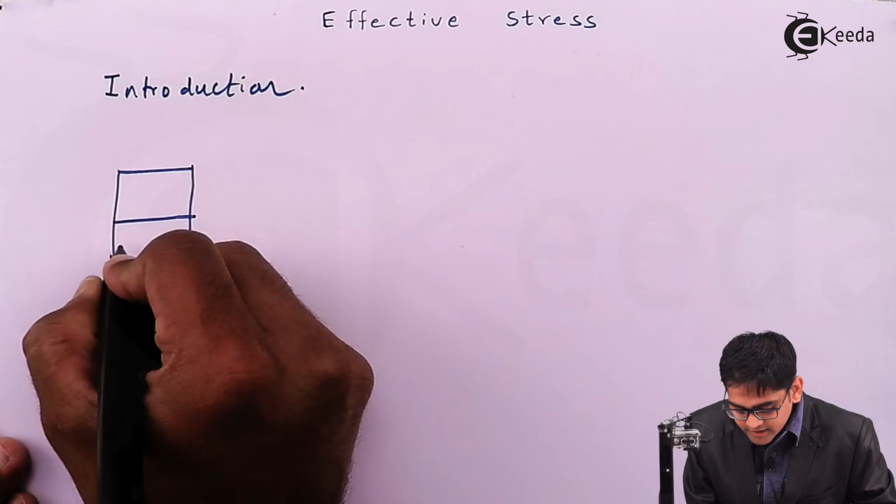So let me start with the introduction first. As you're aware, soil is a multi-phase system. Multi-phase system means it consists of solids, it consists of water, and it consists of a gaseous phase, which is air. So that's what we have seen in the three-phase relationship.

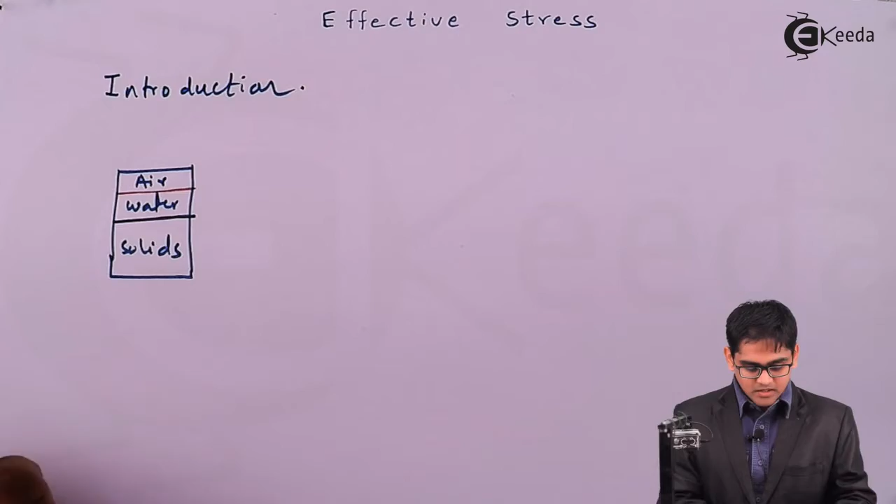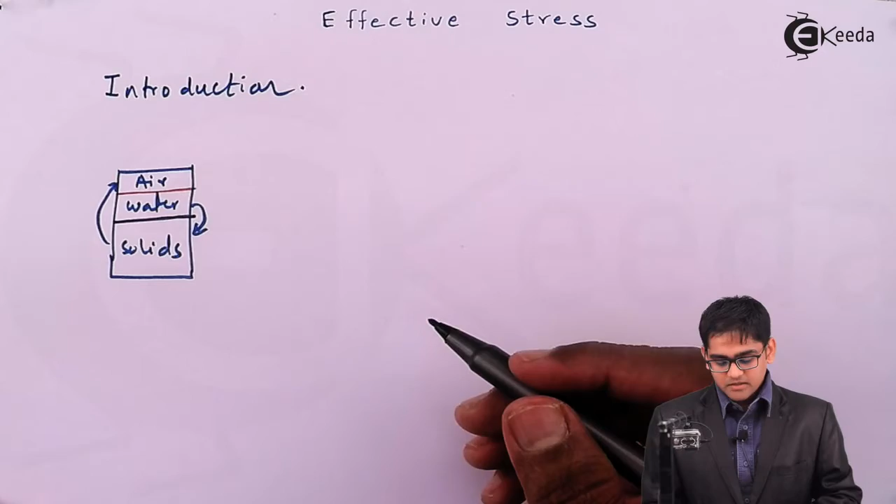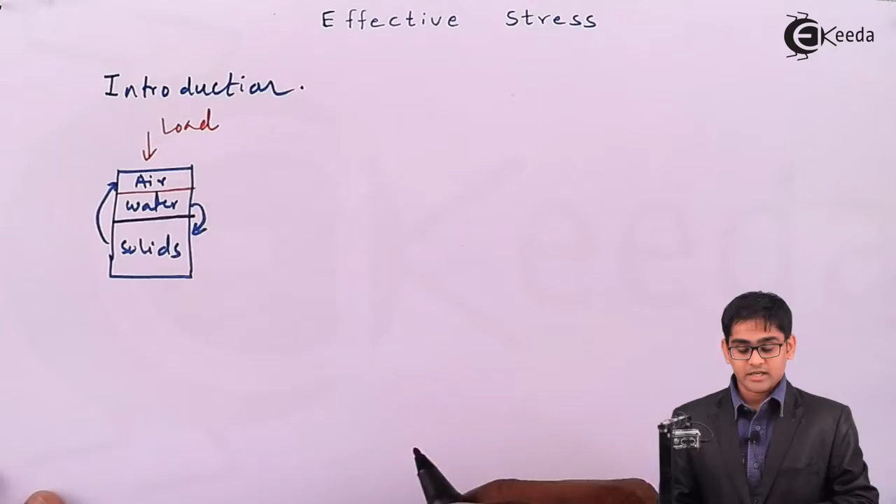Remember, since it's a multi-phase system, you have a kind of interaction of this water along with the solid, and also the interaction of the solids with the air. All these kinds of interaction play an important role once you apply a load onto the soil. So this kind of interaction, and how the soil will behave under the action of the load, is truly determined by these interactions. As you're aware, if you take a very fine grained soil, suppose if I take a clay,

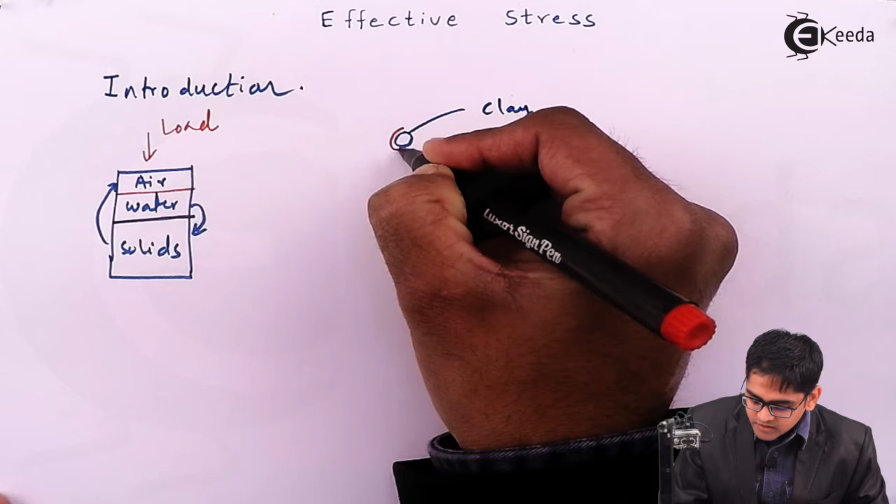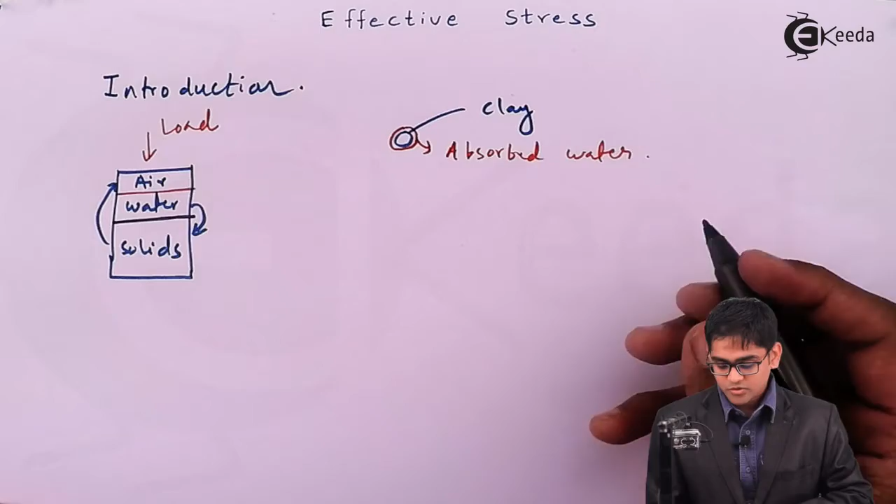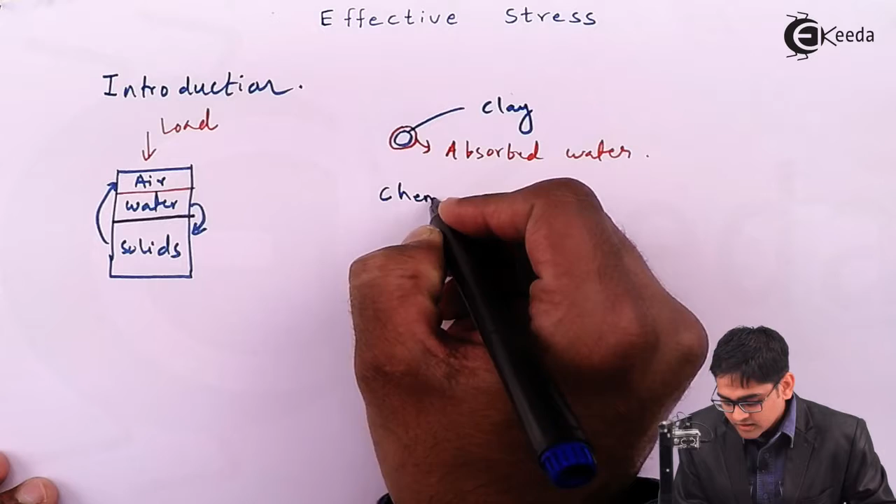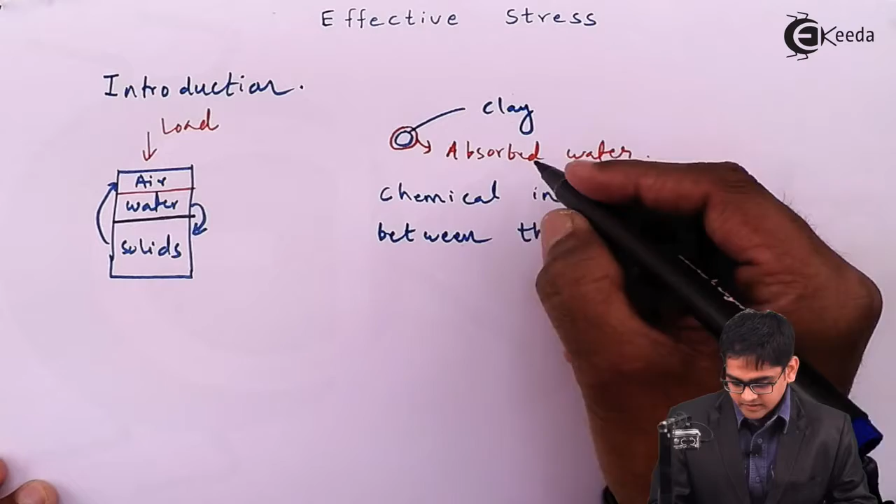the clay has got a layer of water surrounding it. We call it absorbed water. This absorbed water plays a very important role, because clay, as you're aware, is formed by chemical weathering, so therefore there is a kind of chemical interaction between the water and the soil solid. There is a chemical interaction between the water, which is nothing but the absorbed water, and the minerals - the major mineral present in the soil is montmorillonite.

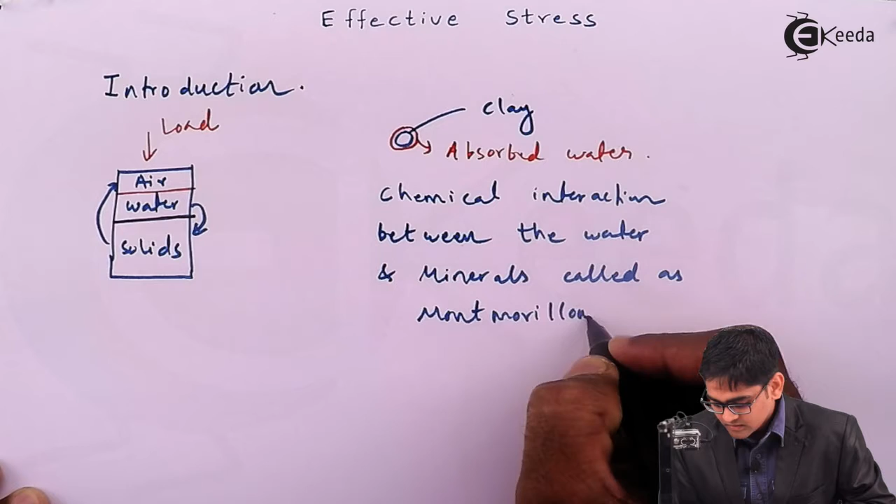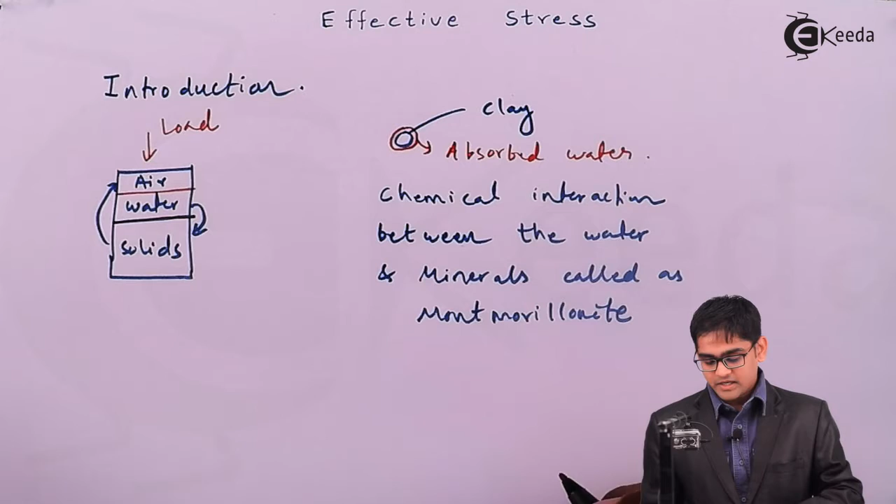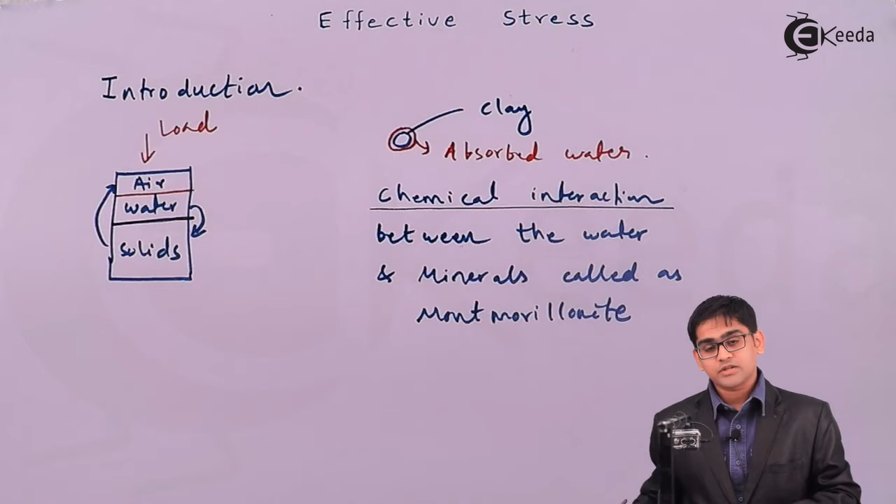Absolutely, we have three different minerals in the clay. We'll talk about it in the later course of time. We have montmorillonite, we have illite, and we have kaolinite. It is specifically discussed in the clay mineralogy chapter. So this kind of interaction, which is specifically a chemical interaction, is very important, which governs the behavior of a soil under an application of load.

What do you mean by effective stress? Before introducing this chapter called effective stress, I would like to solve some of the mysteries in soil mechanics. So the first mystery, or the first break point, is the introduction of total stress.

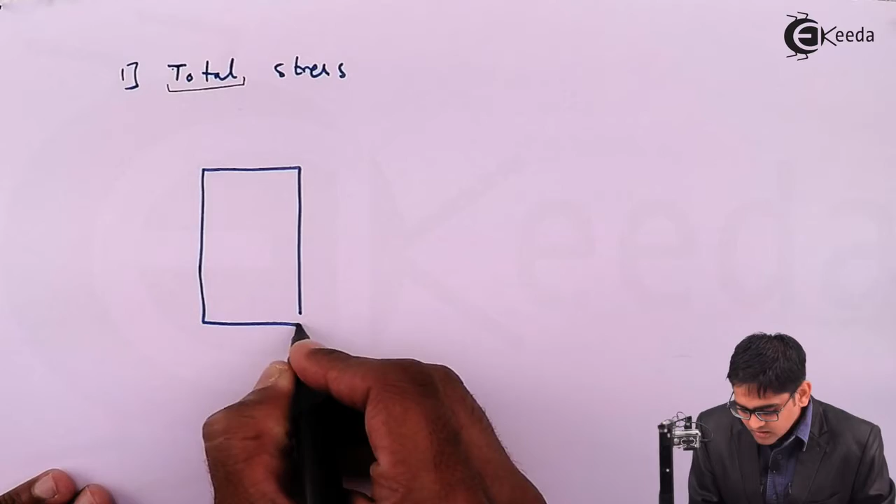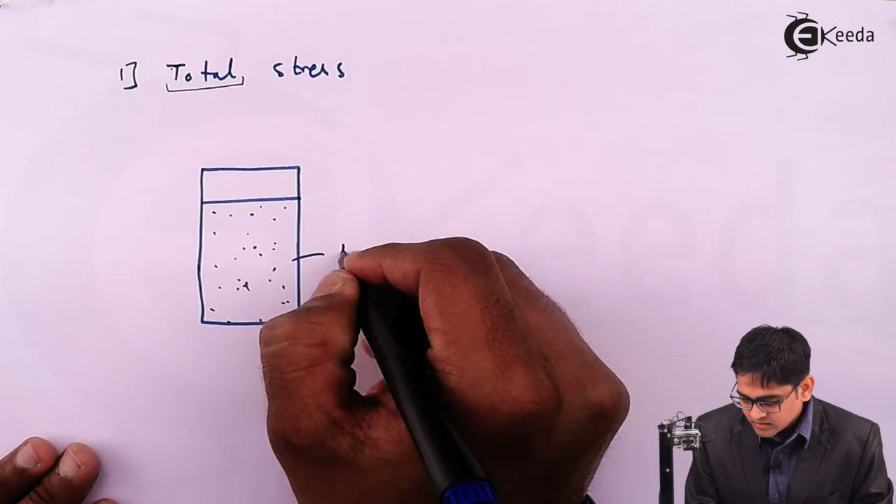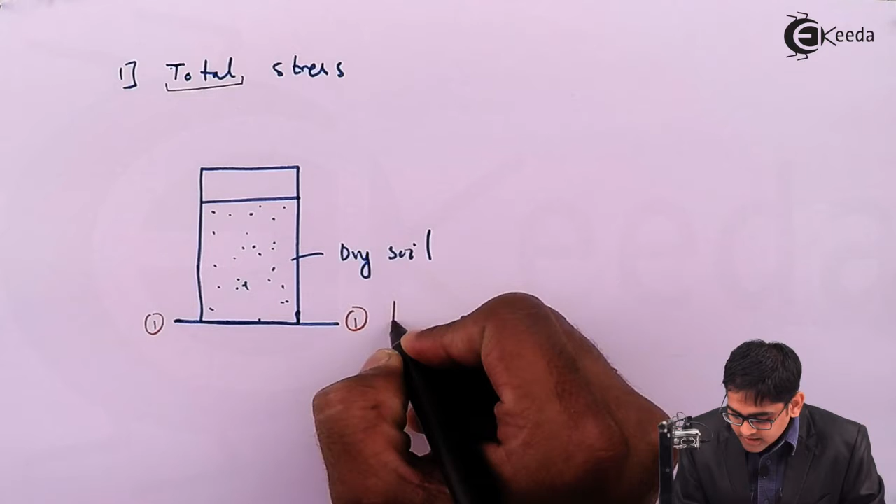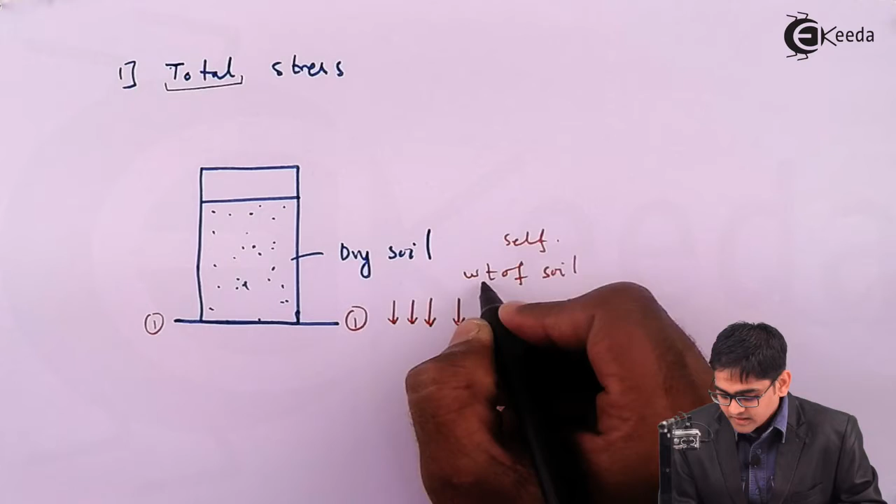As the name suggests, it is a total - it is a total. So if I take a soil, or if I take a container and I fill it with soil, I fill the dry soil. Since I have filled dry soil, at the bottom of this container, if I consider a plane or section 1-1, at the bottom of this layer, the stresses acting are nothing but the weight of the soil.

Absolutely, it's the self weight of the soil divided by this cross sectional area A. And probably if I take a cylinder, then it's circular in plan, which has a diameter D. So it becomes the total weight of the soil which you have placed in this container divided by the total area, which becomes the definition of stress. We call it total stress - it is a total. So this is sigma T, or it is represented by capital sigma.

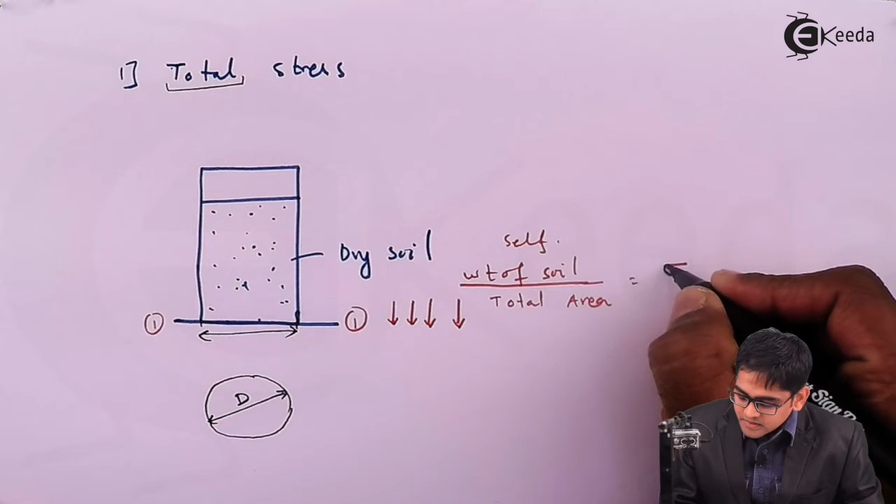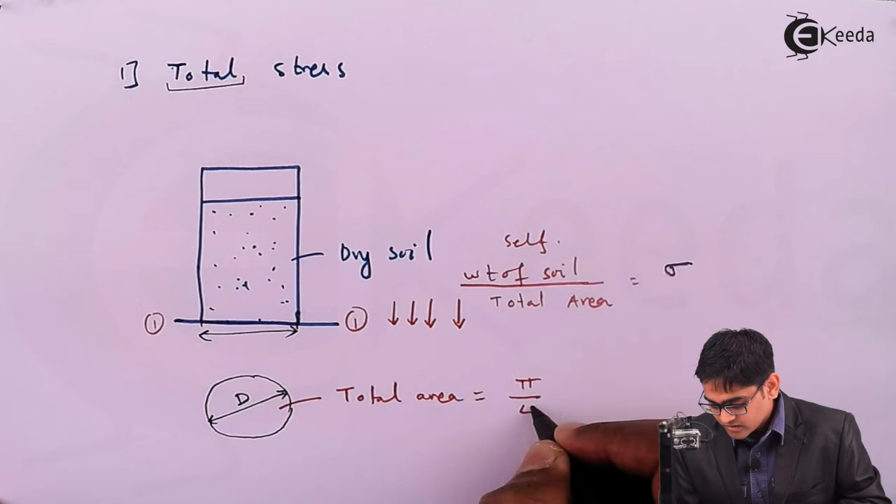And probably this total area in this case is nothing but the plan area of this. So therefore, total area, if I take the cylinder, becomes equal to pi by 4 into D square. That's all, pi by 4 into D square.

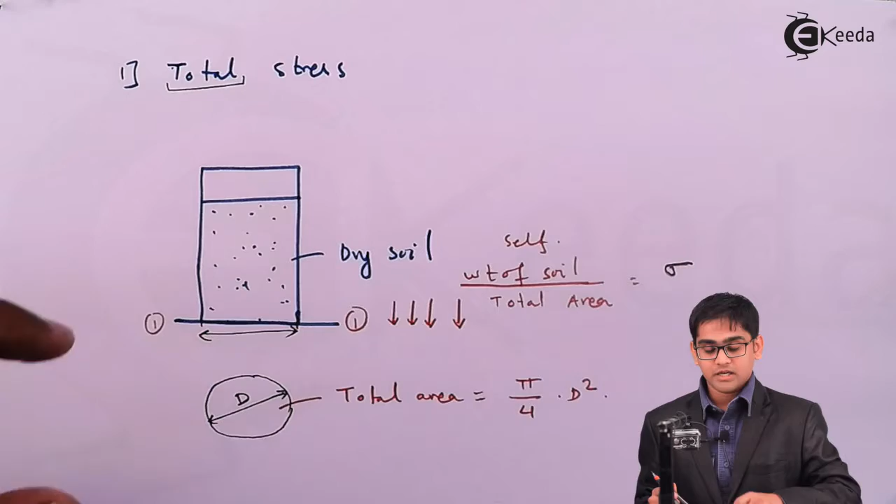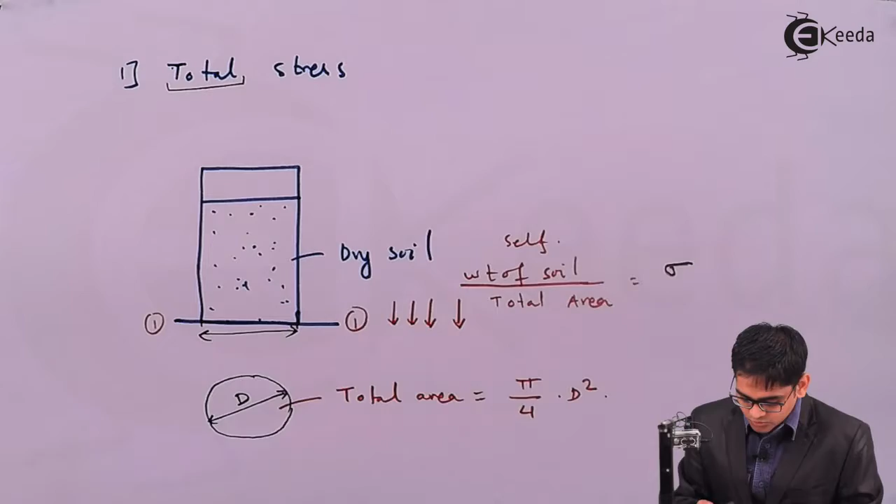Since in this case you know how much weight of soil you're putting in the container, but suppose I don't know the weight of the soil I'm placing in the container, how do I determine the total stress?

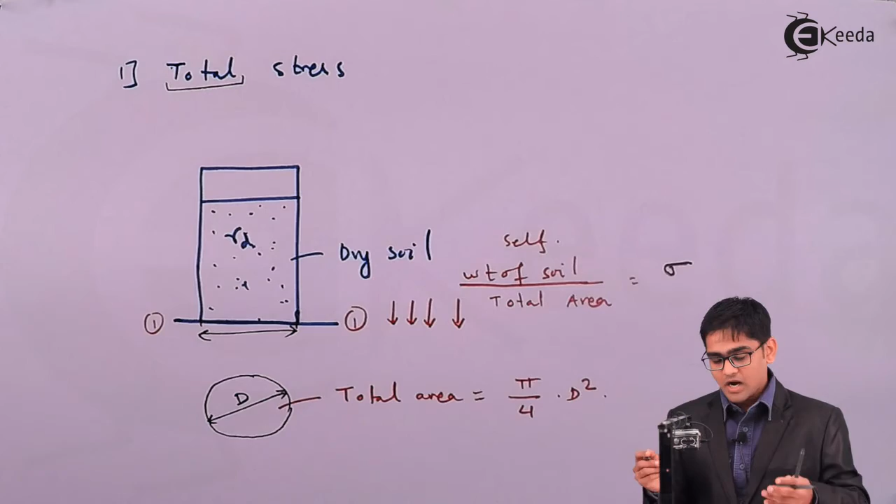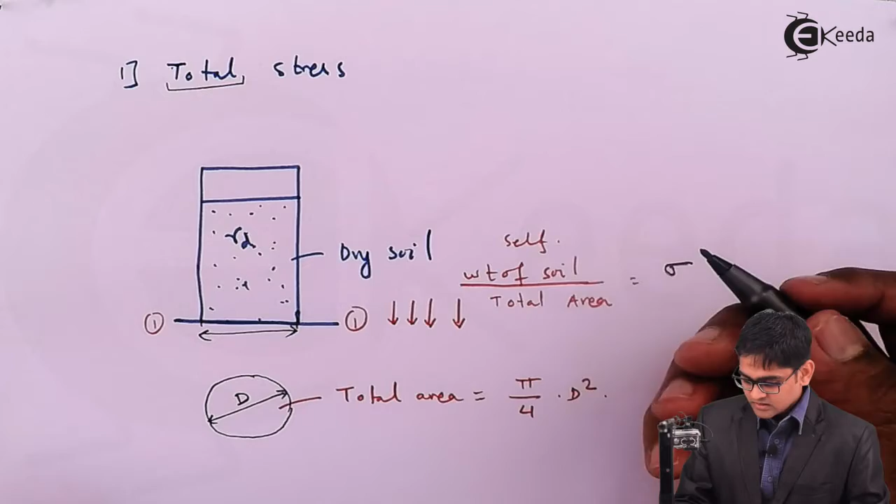Since I place the dry soil in a container, I'll consider the definition of gamma D, which is nothing but the dry unit weight of a soil. If I know just the dry unit weight and multiply by the volume of this cylinder, I will get the self weight of the soil, and dividing by total area gives you the total stress. So for this case, while determining total stress sigma, I'll take the definition of gamma D, the dry unit weight, multiplied by the volume of a cylinder.

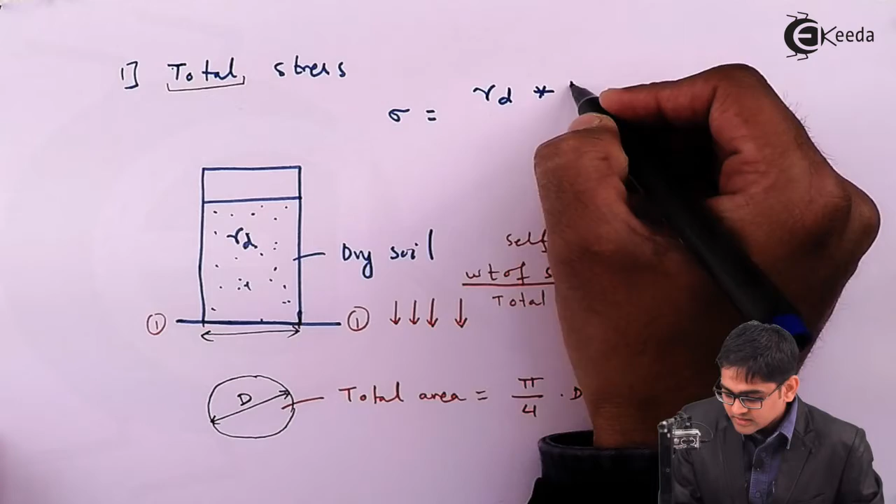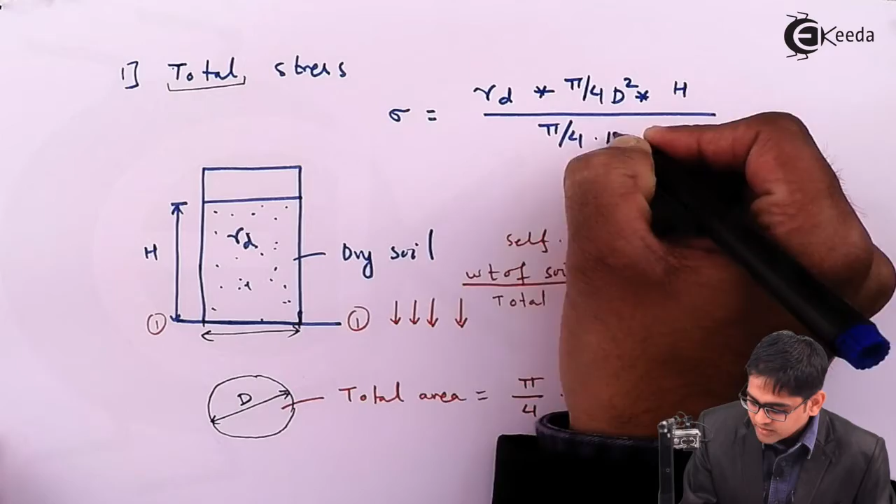Volume of a cylinder is nothing but pi by 4 d square into the height up to which you have filled the dry soil, divided by the total area, which is pi by 4 into d square. So in this term, pi by 4 d square, area gets cancelled, and you end up getting the total stress, which is nothing but gamma D into H.

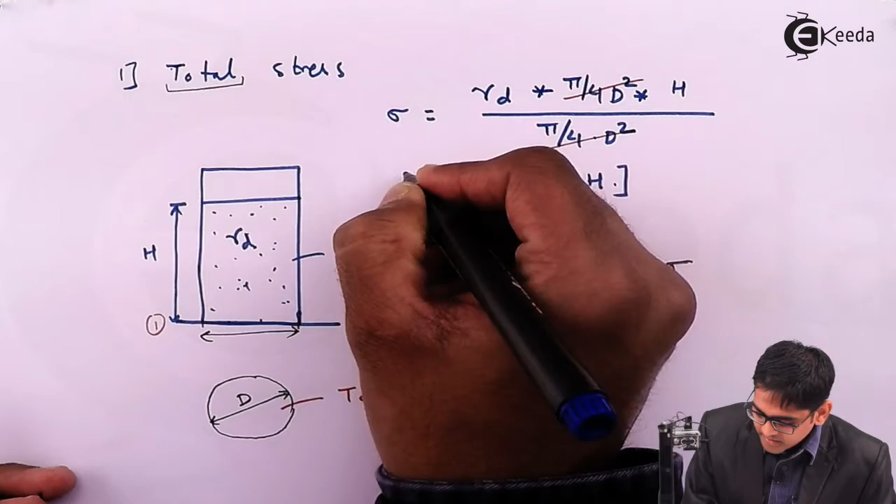Remember, this is a very important expression as far as this chapter is concerned. If you just came to know about the dry density or unit weight, then you can evaluate the total stress just by multiplying with the depth of that layer. So it is very easy.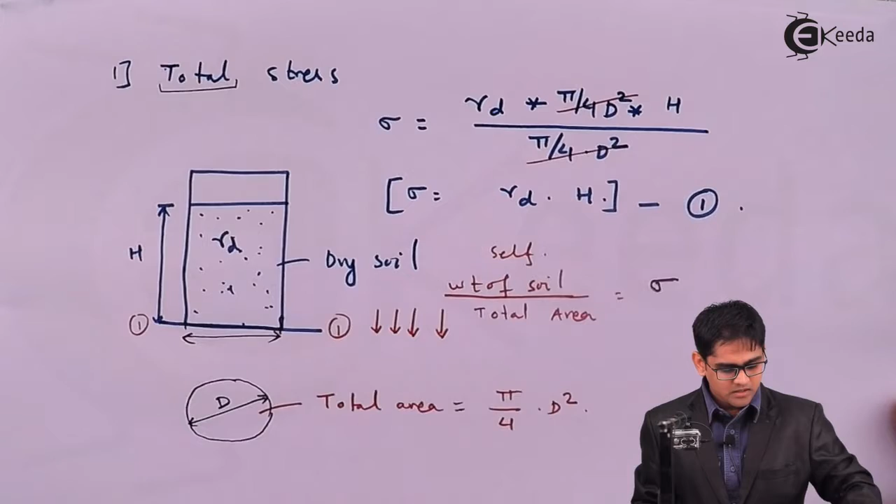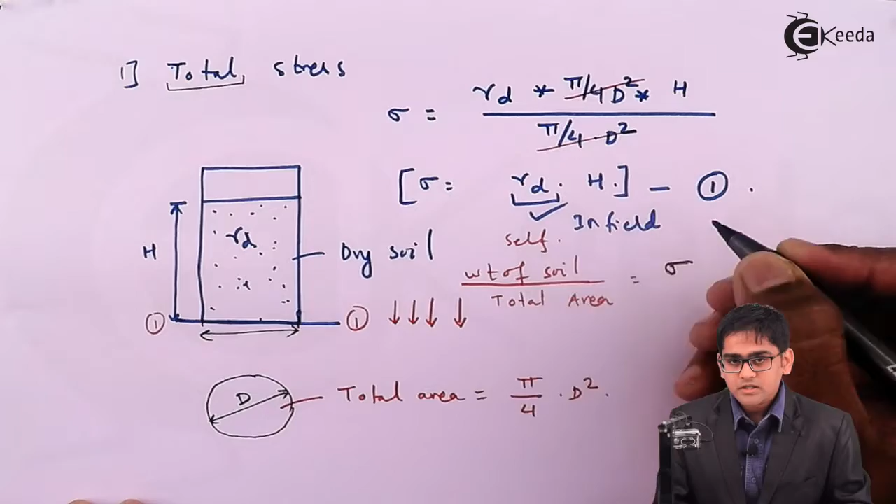In practical purposes, what you're doing is going into the field, digging the soil, taking field measurements, and evaluating this gamma D in the field. You just multiply this gamma D by H in order to calculate the total stress experienced at level 1-1. So this is the first, very simple case I have considered of dry soil.

But if I consider the more complicated case of water in between, then I'll bring one more concept, the definition of the neutral stress or pore water pressure.

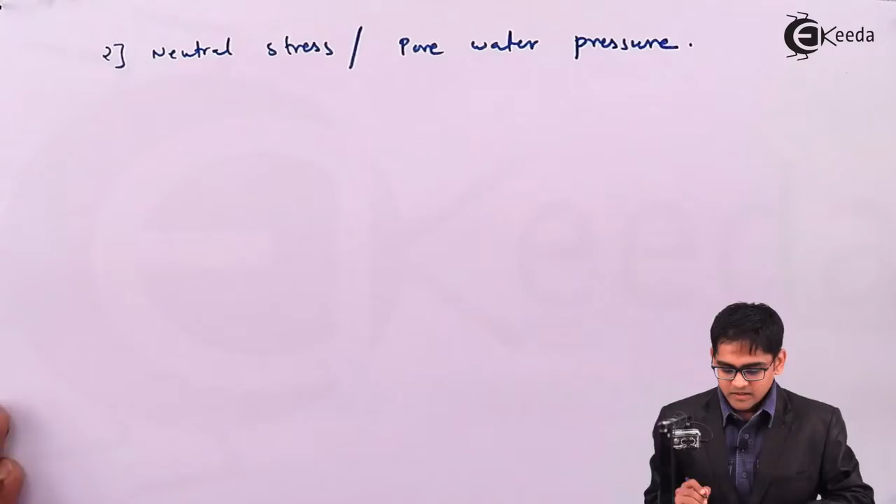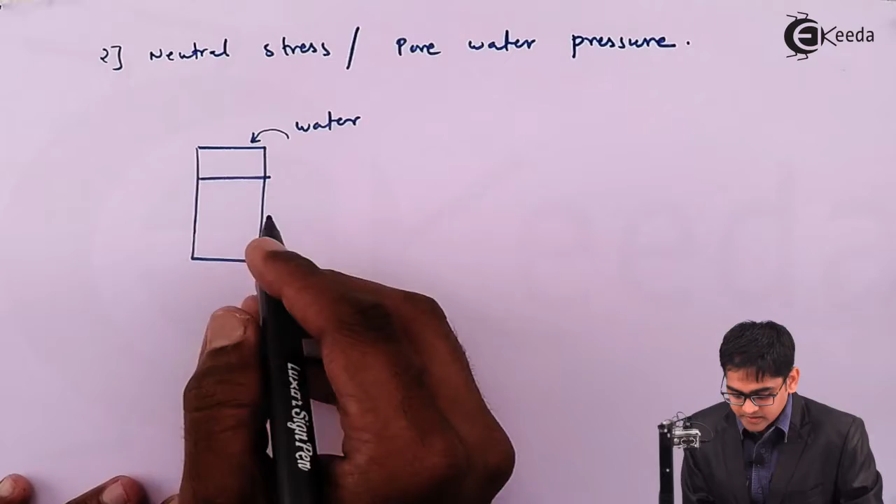Since this is a very simple case I've considered, just the dry soil, in the second case I consider the same example, but I'll add water in this container. The same container, same dry sand, and I'll pour the water in it. Once I start pouring water, the water level goes on increasing, and up to some depth which is absolutely visible - I consider the cylinder to be transparent - it's visible up to a certain depth. So above this groundwater level we have dry soil, and below it's saturated soil.

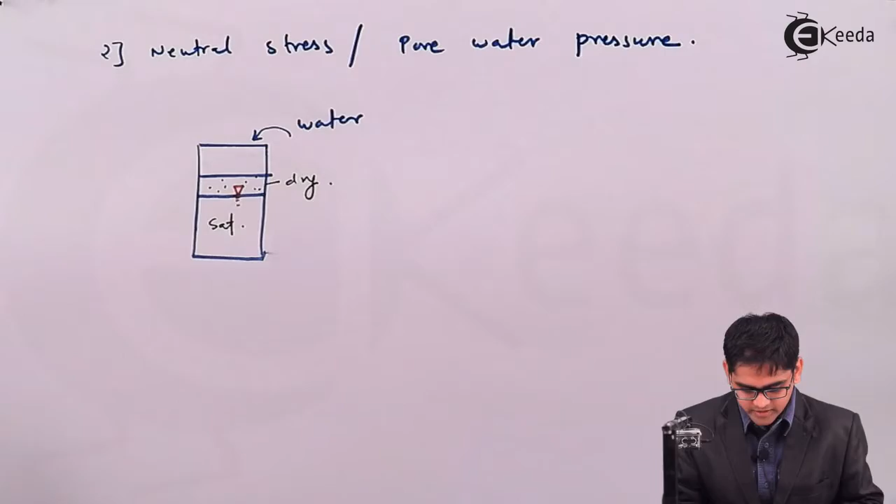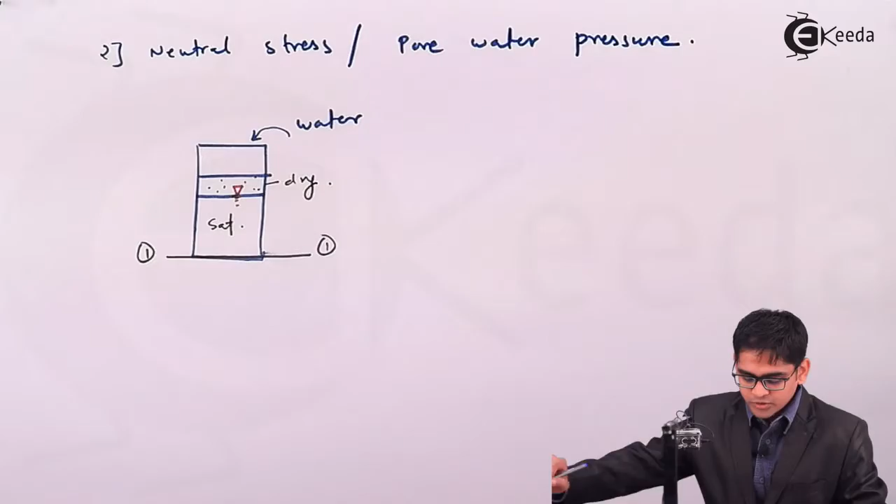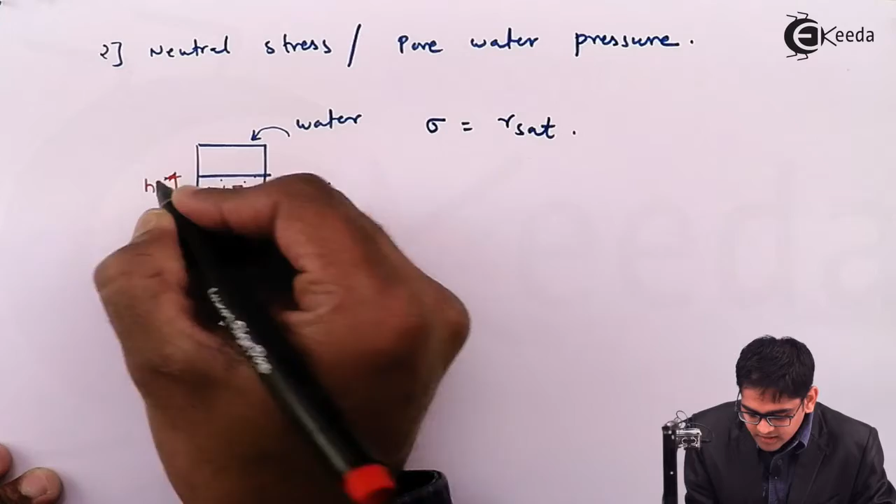If I just take the similar plane 1-1, I will get the total stress, which includes the component of saturated weight as well as dry weight. So total stress in this case becomes gamma saturated into h2 plus gamma dry into h1, if I consider this height as h2 and this height as h1. So this is how we have calculated the total stress.

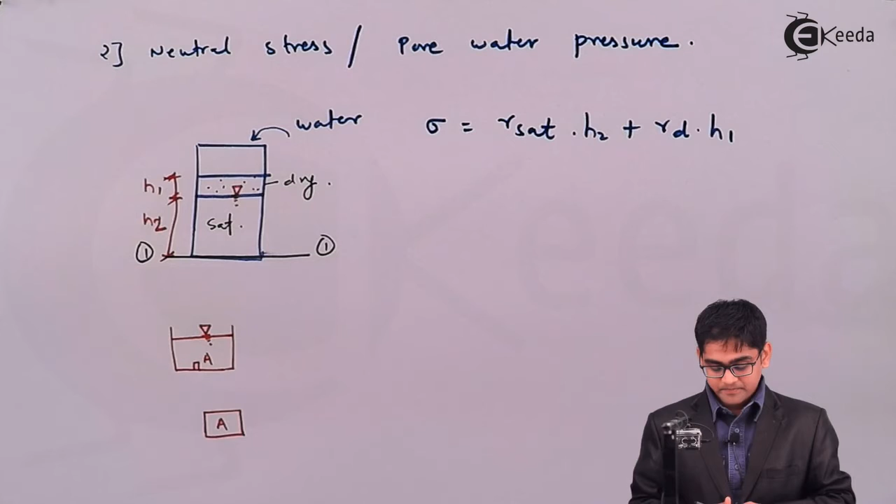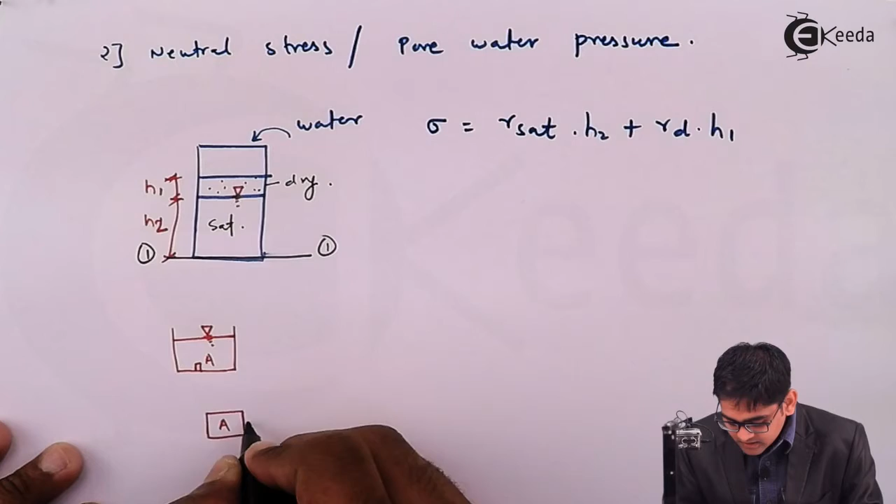But here I have one more component, which is called neutral stress or pore water pressure. Remember, even if you take only water, not soil - if I take a hypothetical case in a container with just water, and consider a small element A at the bottom or anywhere, as you're aware from Pascal's law, this element has pressures all around it from all directions, and the pressure from all directions is equal.

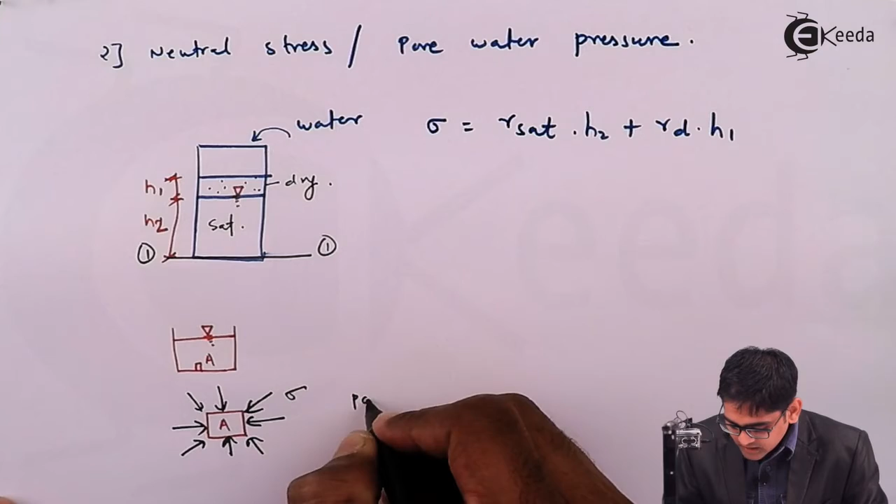That's what Pascal has told us. This is a very famous law called Pascal's law in fluid mechanics that you have probably studied. Similarly, if you apply the same law here, this pore water pressure is acting equally all around. So by considering this law, the stresses are going to be same in all directions, and therefore there is no shear stress in the soil.

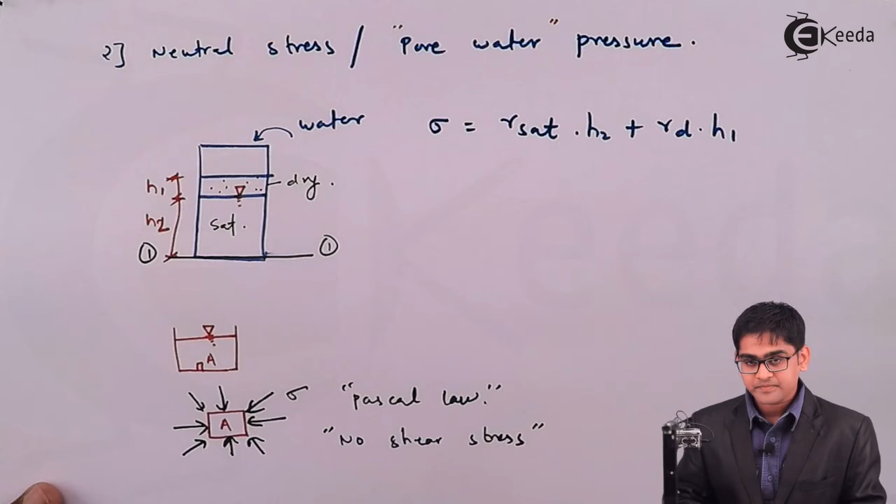So there is no component of shear stress in the soil. Remember, pore water pressure is a pressure which doesn't shear off the soil. I'll repeat: since this pore pressure is acting equally in all directions, it has no shear component of stress. Therefore, this pore water pressure is not responsible for the shearing of the soil.

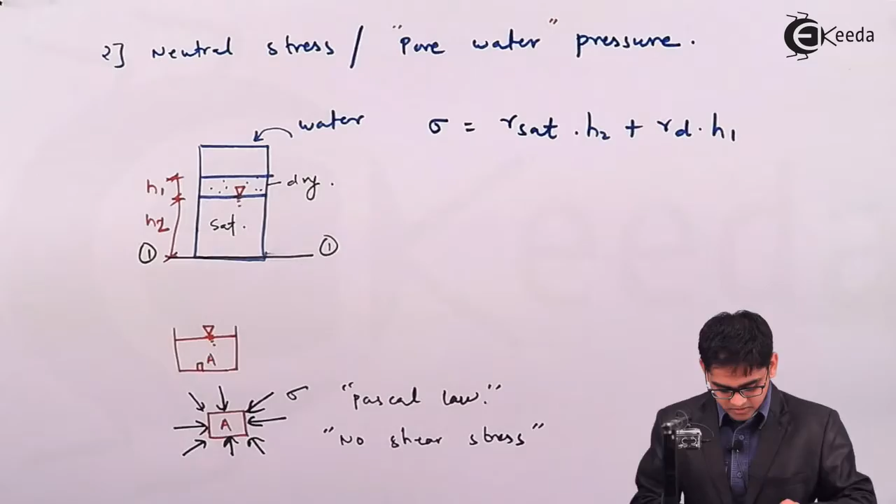So even if you place water up to a full container, the soil is not going to fail. The soil is still in static equilibrium because the water is not shearing off the soil. But this water component does have to do with the total stress, because total stress has two components: one is pore water pressure, and the other is effective stress.

So I bring a definition of effective stress on this slide. Total stress becomes equal to effective stress plus pore water pressure. This is very important - we have two breakups of total stress, made up of two components: one is pore water pressure and the other is effective stress.

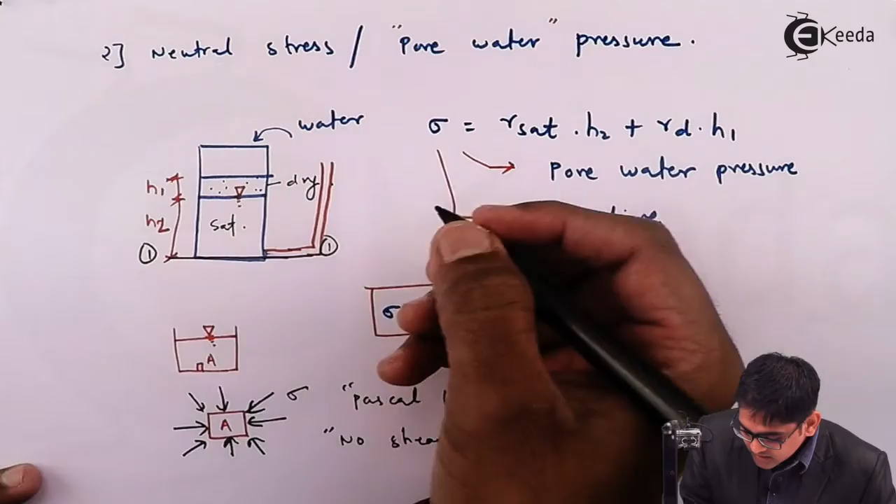If you have to determine pore water pressure, it is quite easy. Suppose I consider this level 1, and I want to determine the pore water pressure at this elevation - it's very easy. You just need to place a standpipe or piezometer at this section, and by doing so you'll get to know at how much level the water will be rising.

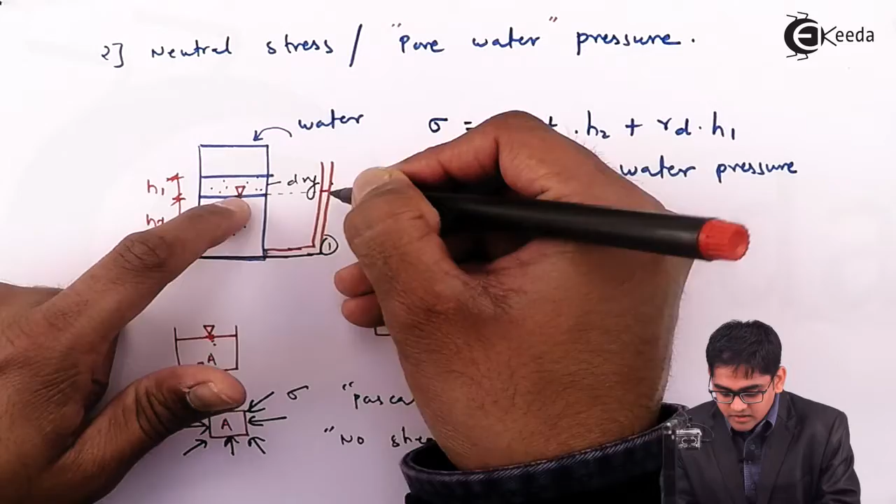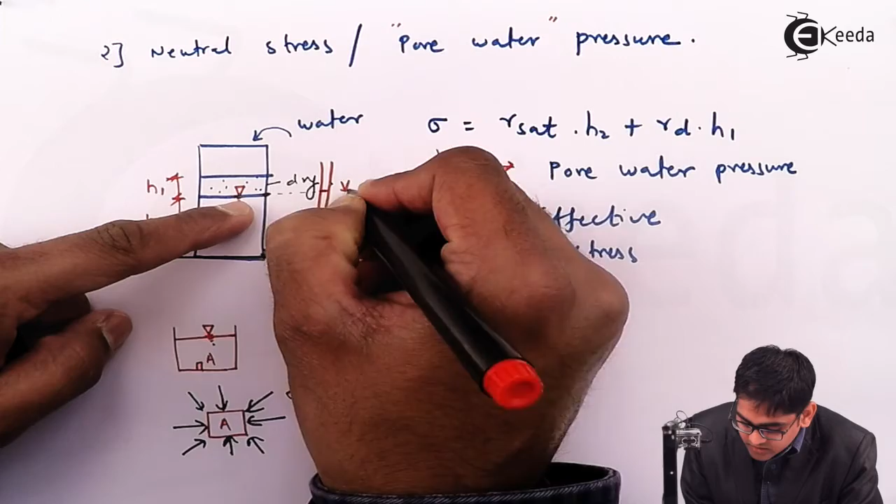Since the original water level is this one, the same water level will be maintained, because if there is a difference between this water level and that water level, then flow will occur. Since there is no difference in water level, I consider this a no-flow condition. This level and this level are exactly the same, so this is no-flow condition.

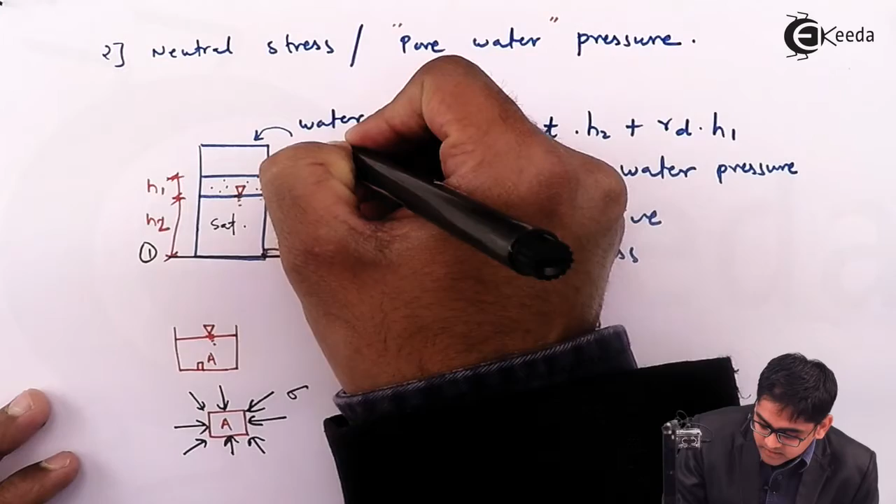If there is a difference between point 1 and point 2 in water level, there will be a head loss, and whenever there is a total head loss, flow is going to occur. If this level is at a higher level, then obviously water will flow from high elevation to low elevation, so water will be flowing upward like this.

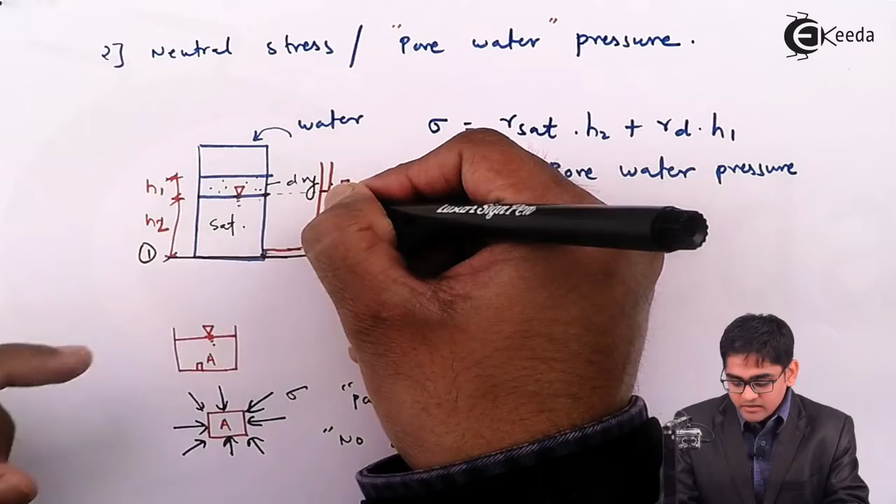If the water level is downwards, that means water will be flowing from this point to this point, because this is the length of traversal under consideration, and the difference is just the head loss, or total head loss, delta H. Since there is no head loss here, this is specifically a no-flow condition.

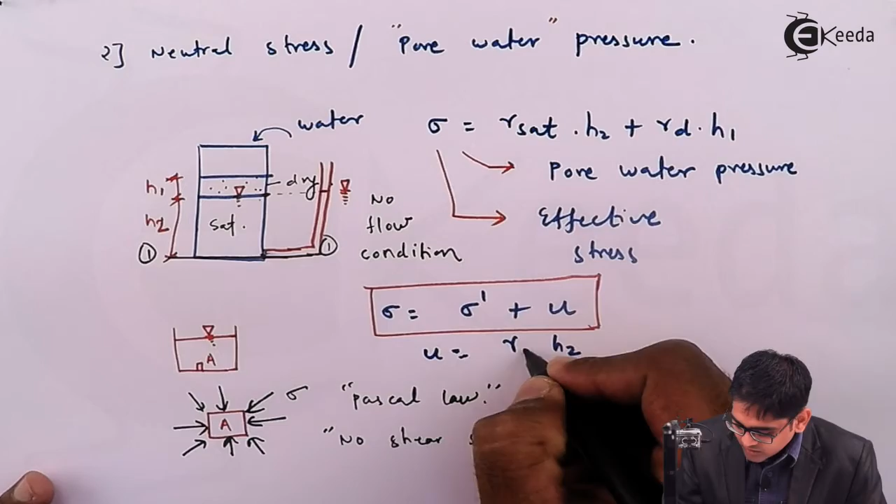Since it is rising up to a height equal to H2, I'll use the same principle again and multiply H2 with the unit weight of water in order to calculate the pore water pressure, U. Pore water pressure is commonly denoted by a small u.

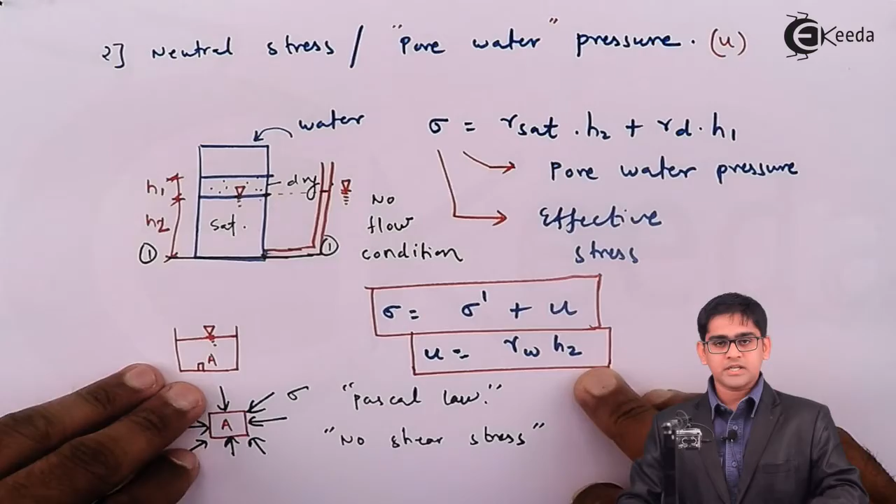So first we have seen how to determine total stress, and also we have seen how to determine pore water pressure. By evaluating total stress and pore water pressure, you can evaluate the effective stress. Just by deducting the pore water pressure from the total stress, you will get the effective stress.

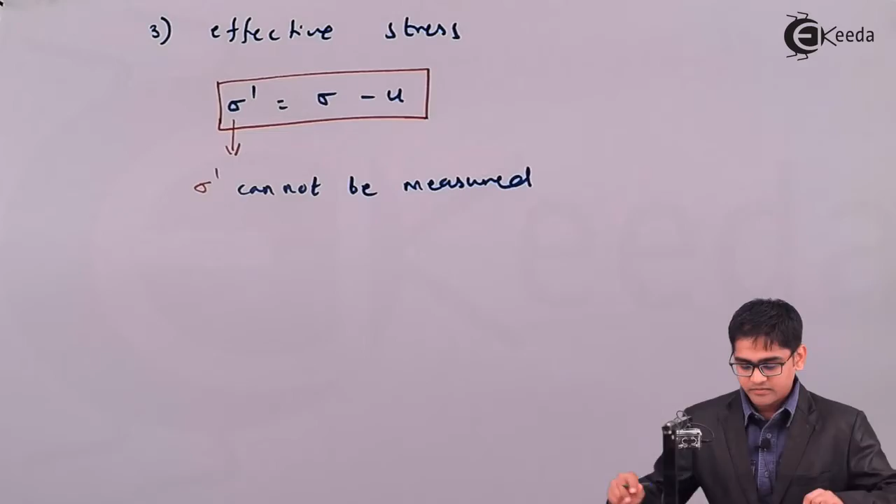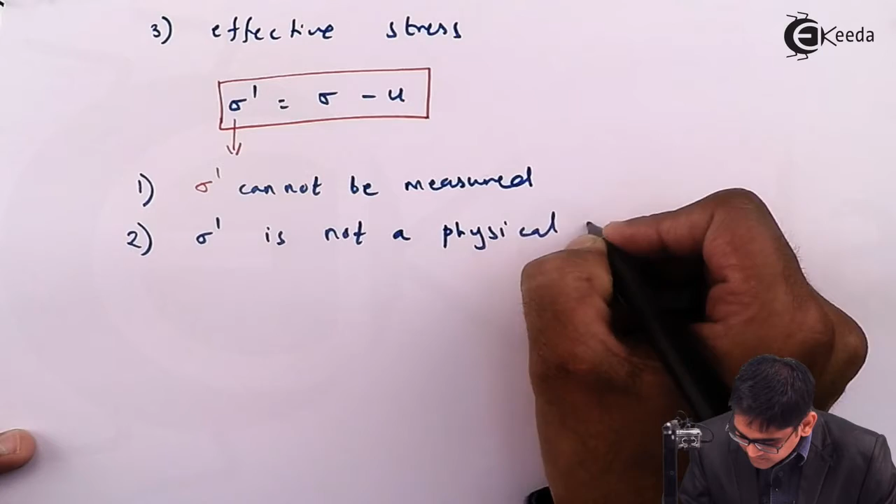Remember, there is a way to measure the pore water pressure directly, and there is no way to measure the effective stress. So effective stress cannot be measured, sigma dash cannot be measured. I would like to highlight very important points in this concept of effective stress. First point is that it cannot be measured. Second point, effective stress is not a physical parameter.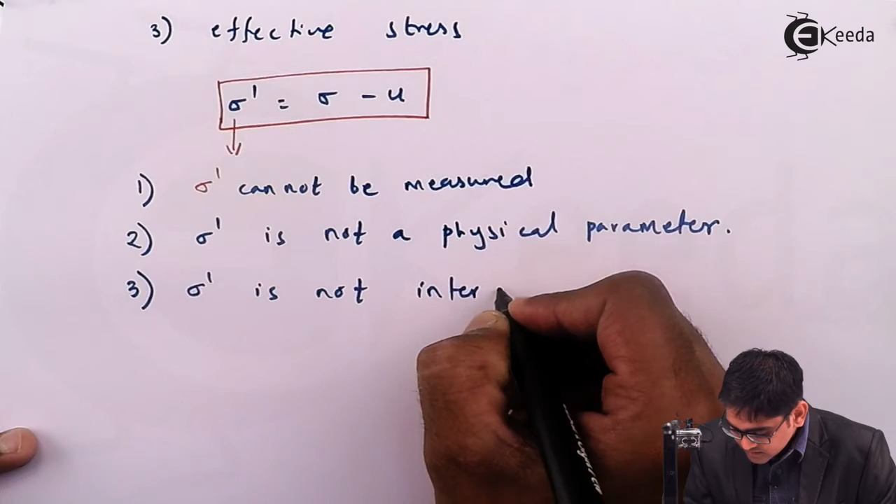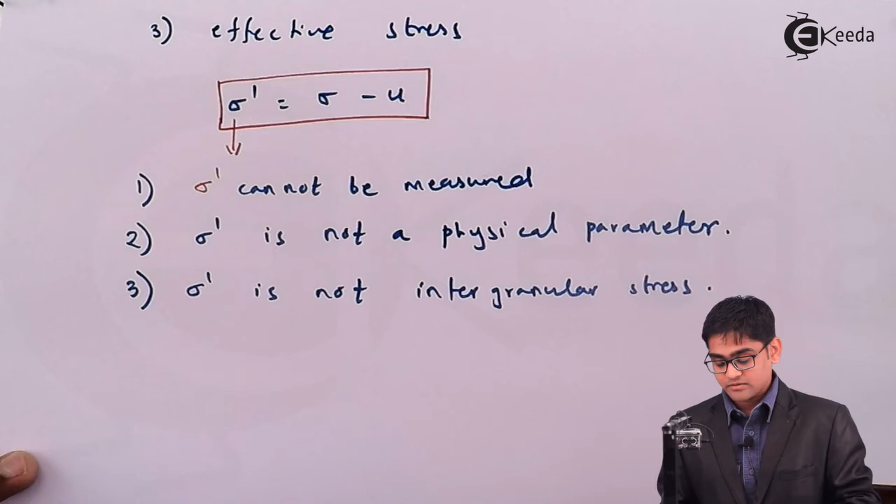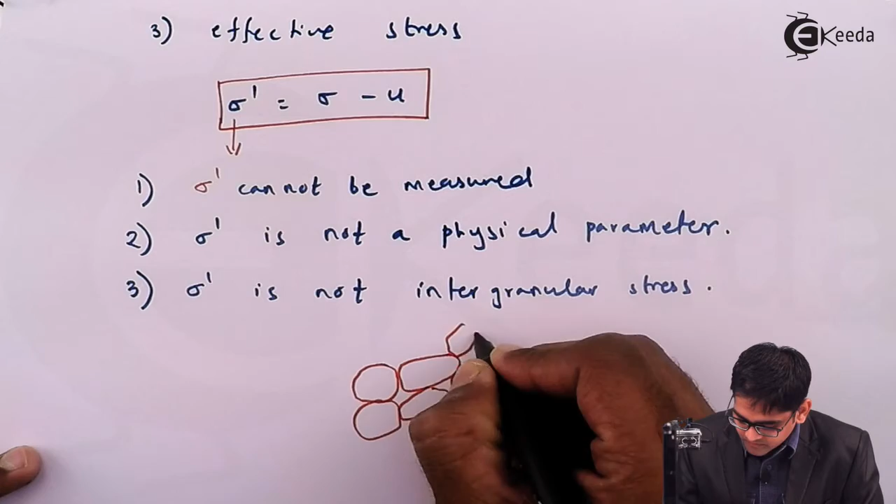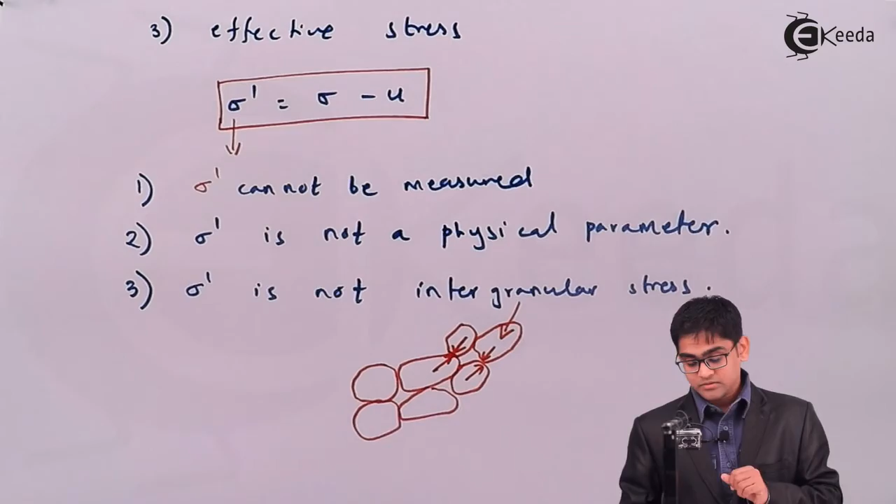Third important point is that effective stress is not intergranular stress. Many researchers have claimed that sigma dash, the effective stress, is intergranular stress, but it is not. Intergranular stress is nothing but the stress between adjacent soil particles. If you have such particles, consider this plane - what is the stress acting between the two particles at the contact area? This is the intergranular stress. But remember, this intergranular stress is not the effective stress. In fact, it is something else.

So we have seen the definitions of all the stresses. First total stress, then pore water pressure, and finally effective stress, and also how to evaluate effective stress in case of soil. We have seen evaluation of effective stress in case of fully saturated soil samples, but in case of partially saturated soil sample, the procedure or formula is as follows.

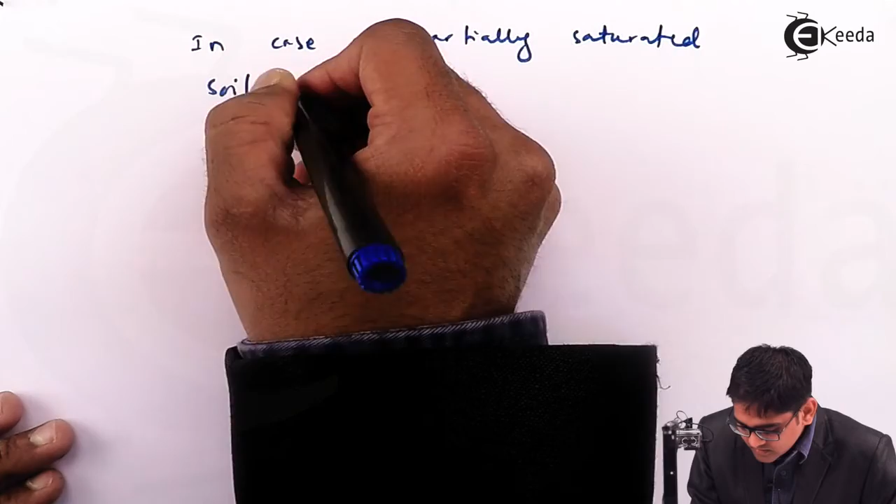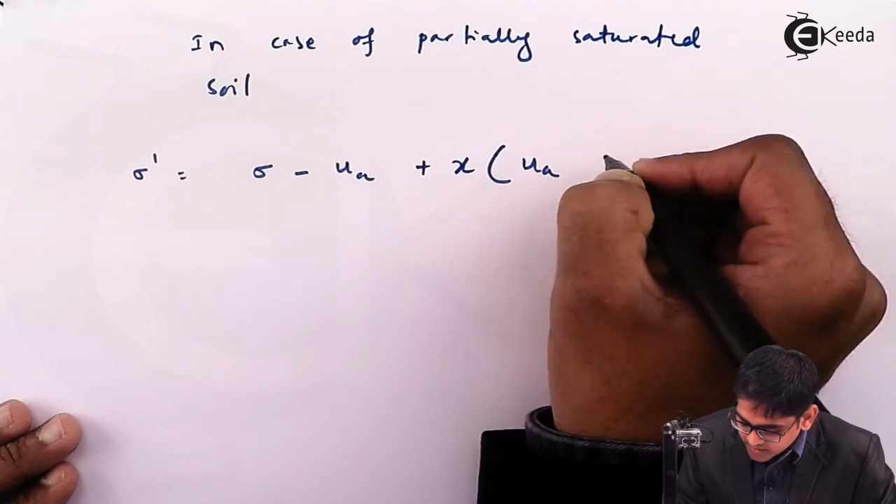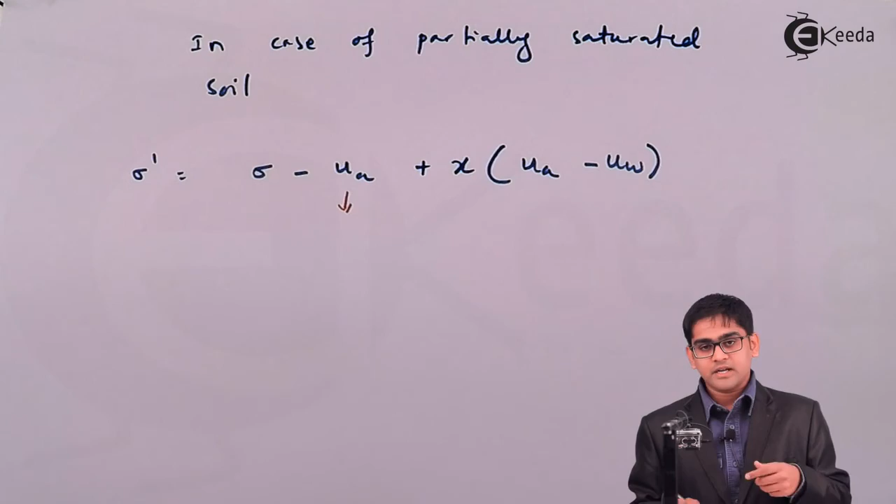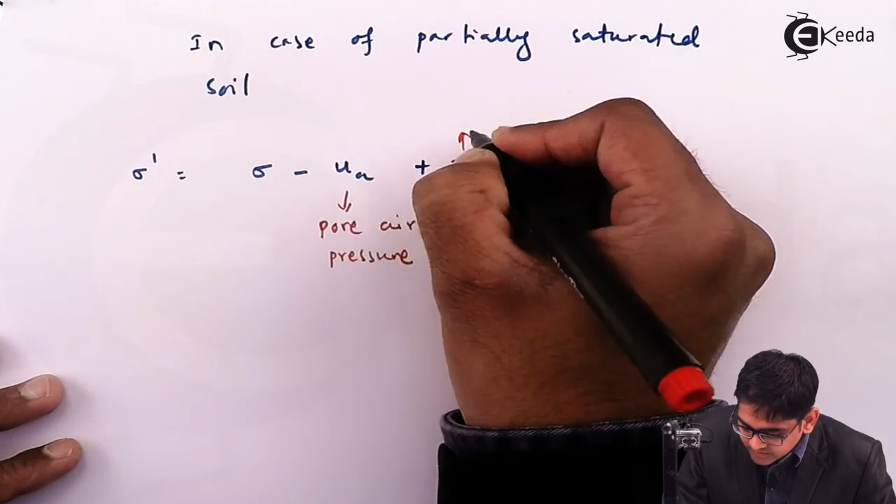The effective stress is nothing but the total stress minus pore air pressure plus some fraction into pore air pressure minus pore water pressure. Remember, because we have got three phases, we have an air component as well. If air is exerting a pressure once you apply a load, that pressure is called pore air pressure. This x is the fraction, and UW is pore water pressure.

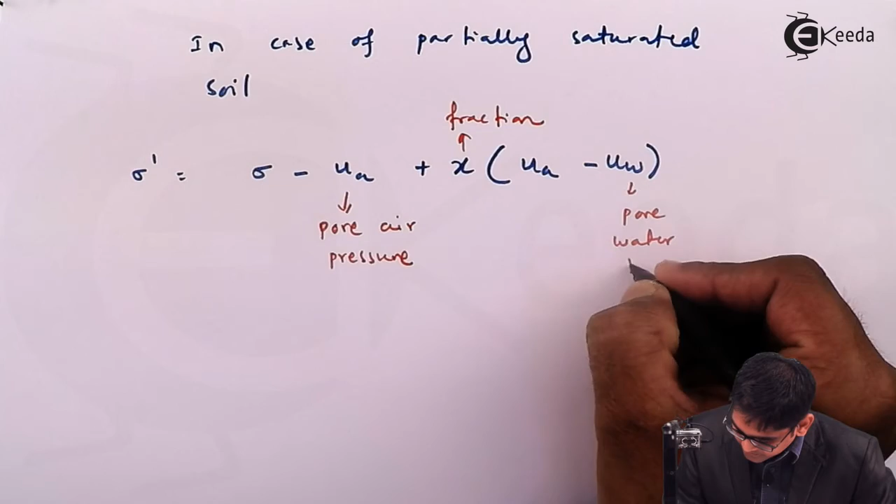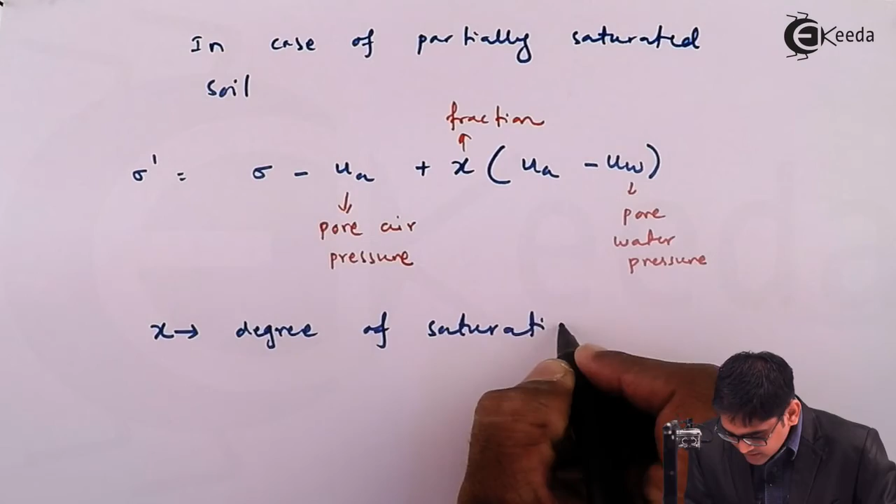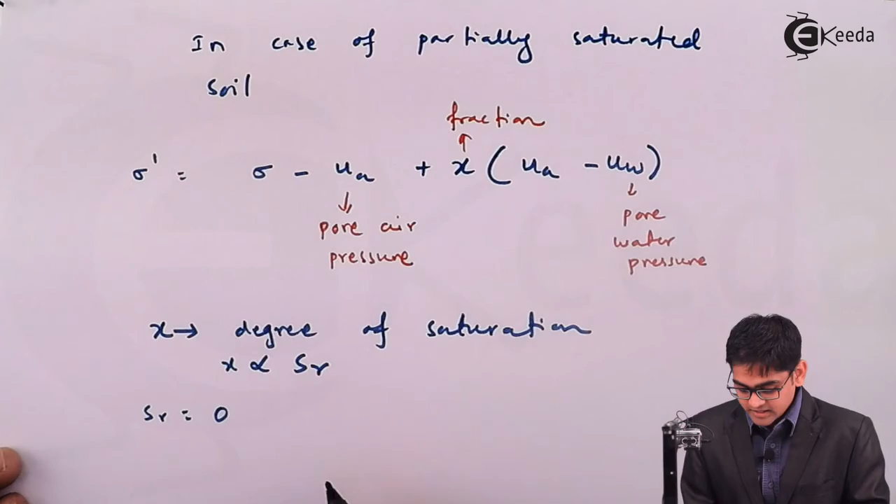This fraction x is directly proportional to the degree of saturation, and the relationship is very easy: X is directly proportional to degree of saturation SR. If you've got dry soil, degree of saturation is 0, you've got only pore air pressure, and in that case sigma dash will be equal to sigma minus UA. But for evaluation purposes, you neglect the pore air pressure unless it is given, in which case you need to take it into consideration.

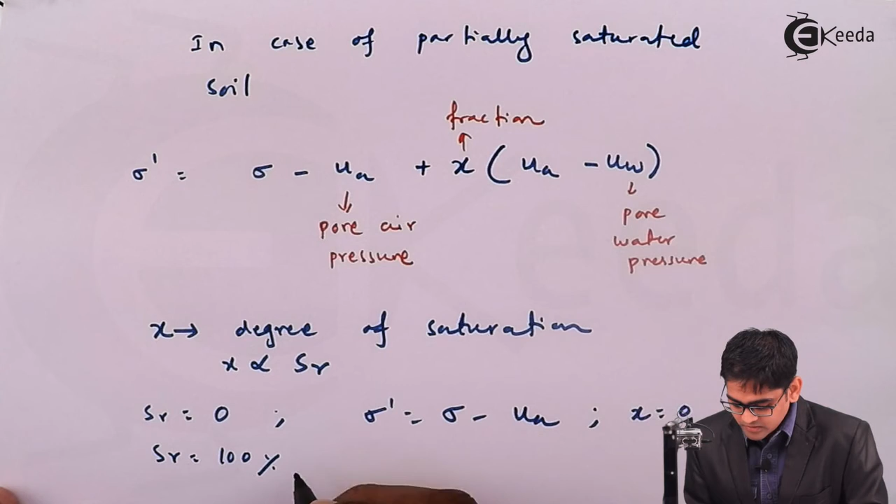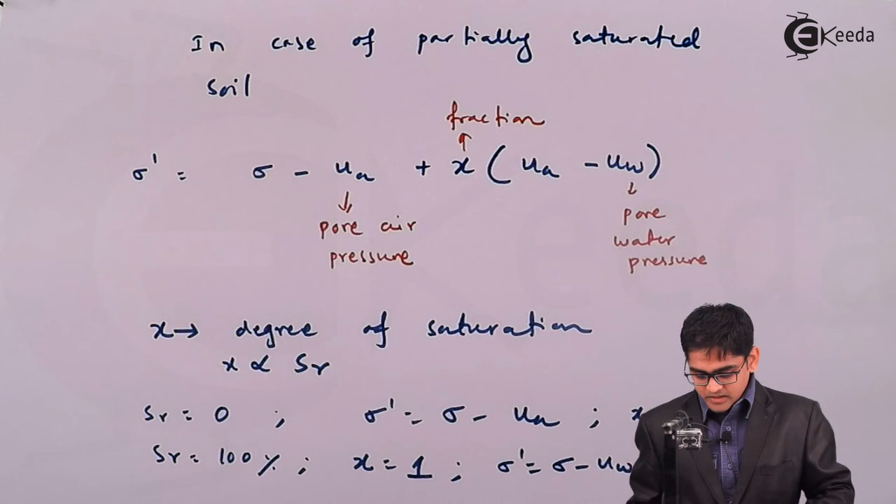If the degree of saturation equals 100%, then X becomes equal to 1. In the first case, X equals 0; in the second case, X equals 1, and therefore sigma dash becomes the normal formula - minus UA plus UA gets cancelled, so it becomes sigma minus pore water pressure, which equals the effective stress. So this fraction accounts for the volume of voids filled with water, which is related to the degree of saturation SR.

So this is the formula for evaluating pore water pressure, pore air pressure, and effective stress, and by this formula you can evaluate the effective stress in case the soil is partially saturated. In case of fully saturated soil, there is no need for this - it is just the regular case where you deduct pore water pressure from the total stress to evaluate the effective stress.

So this completes the concept of effective stress, and we'll move ahead with capillarity. Thank you.